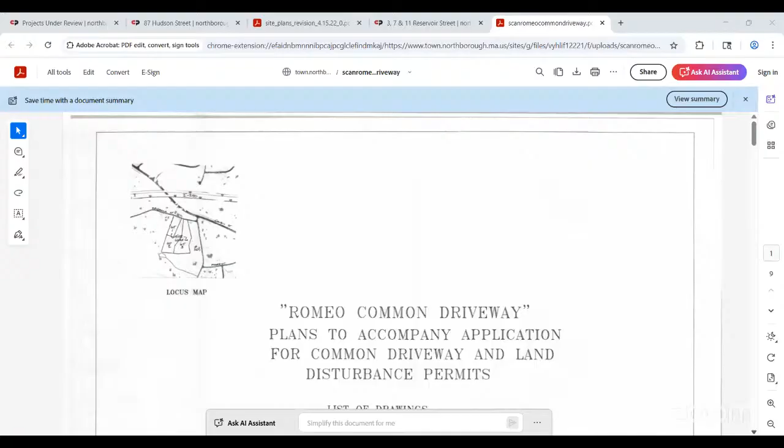The entrance is about, let's say, 600 feet from the intersection of Crawford Street and Church Street. Let's see, share that screen for us, Larry. Yeah, like 500 feet, I guess, from the intersection of Crawford Street, the Church Street end of Crawford Street.

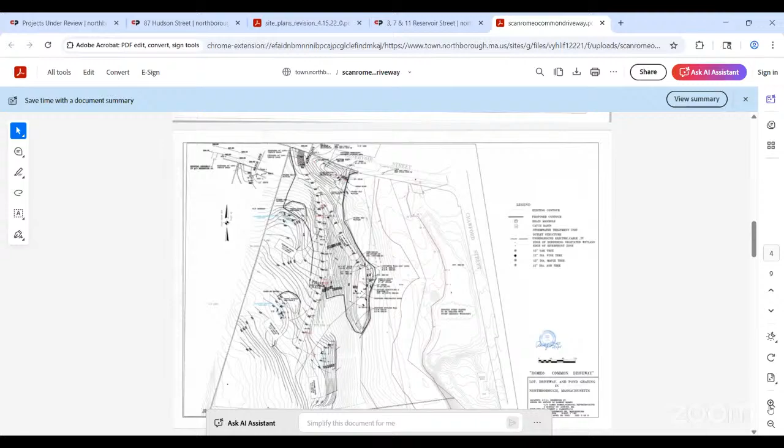So there is a good deal of wetlands on the property, but most of it is on the existing house lot, which is not included in this presentation. The house lot was previously subdivided by ANR plan, I think 3 or 4 years ago. And that house still sits on the same lot as previously presented to the planning board.

So we have before the planning board approximately 9.9 acres that we would be developing. According to our land disturbance plan, total disturbance would be about 4.9 acres. So between the detention pond, which we need to control stormwater, and the houses and the driveway, our total disturbed area is approximately half of the total area of the 3 lots.

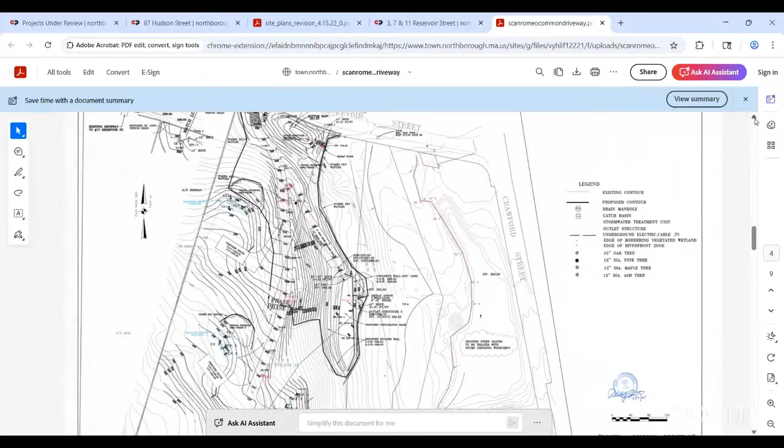Lot 1 is about 2 acres, and then the other 2 lots are reduced frontage lots, so they have 50 feet of frontage, and they have over 4 acres, I think. 4.07. So I think 4 acres is the limit for the reduced frontage lot. So lots 2 and 3 are reduced frontage lots.

So Laurie has pulled up the plan here, which shows the limit of the driveway on the left side of the screen, the dash line proposed. The easement line is 30 feet, and the proposed pavement width is 20 feet. Up at the southerly end of the driveway, where the hammerhead is, that hammerhead is proposed so that the fire trucks can turn around and come in, and if there was a fire, they can easily get out of the site. That is a typical dimensional turnaround for the big fire trucks.

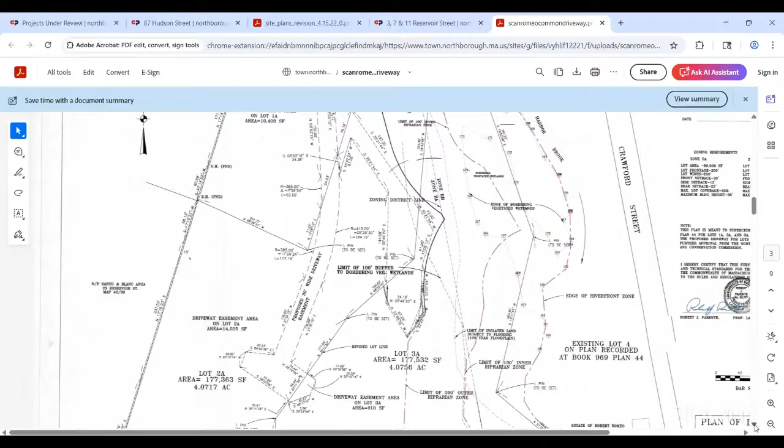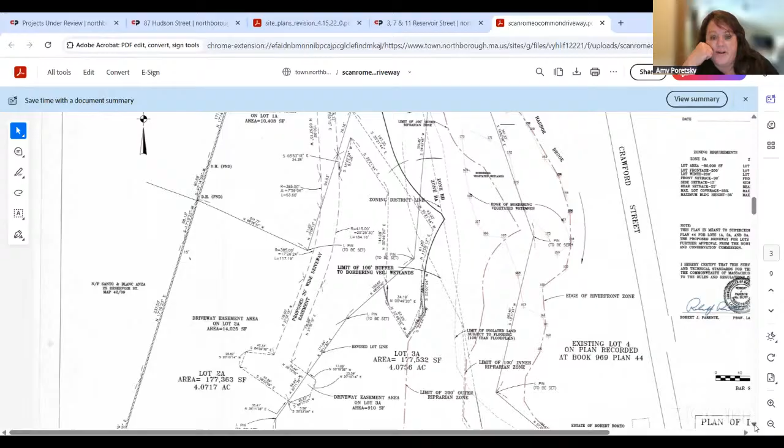Question while you're talking about that - will both lots 3A and 2A connect to the hammerhead? I don't see the houses on there, so I was wondering, are they sharing the hammerhead? Yes, so there's a little bit of driveway easement on lot 3A. So the limit, a little bit of the hammerhead is on 3A, but most of it, the majority of it, is on 2A.

But the house, will that be up on the hammerhead, is that what happens? No, the hammerhead - so the folks that buy the house for lot 3A, they basically will drive right through a portion of the hammerhead and get to their house. I see it now, yeah, it was down, I didn't see it at first where the house was. Okay, well, it doesn't show on that other sheet because that's the sheet that goes to the registry of deeds, just the way we prepare the drawings.

So conservation wise, we have actually ended up adding a plan.

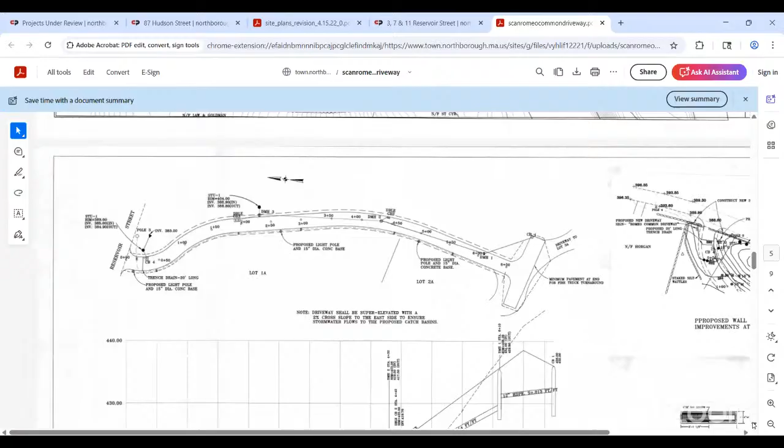So originally we had an erosion control plan, a profile of the driveway, so that DPW could see the slopes and the drainage and all that. But we actually added a drawing plan of temporary sediment storage areas. That's the profile of the driveway, and the slopes meet the planning board regulations.

I think we might be up around 9%, but the middle of the driveway is like 7%, I believe, or vice versa.

Conservation agent Vinny has asked me to add a couple of double catch basins, since he was concerned about potential water going onto Reservoir Street, which the regulations don't really allow. So the first two catch basins in the middle of the driveway will be double grated, in a 5 foot diameter versus 4 foot diameter.

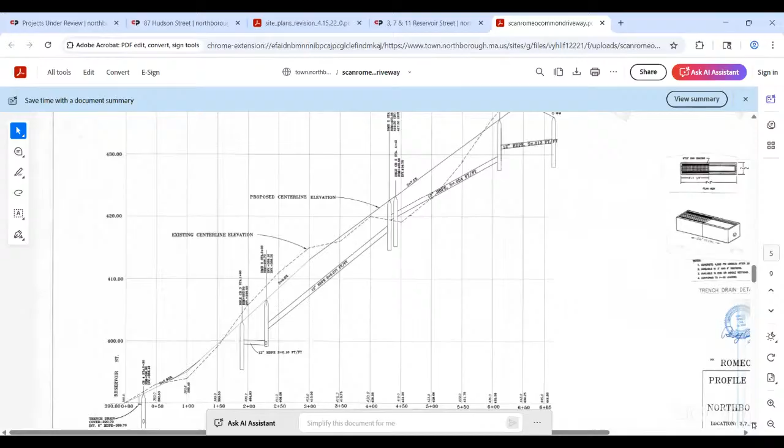So that has made some serious help to the drainage system itself. The temporary sediment areas, we're phasing the construction of that.

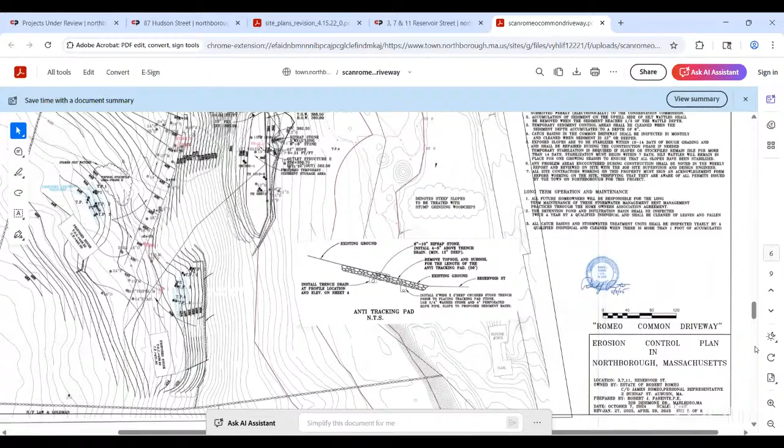Can we go back to, let's see, sheet six has the total, a dotted line for the disturbed area, plus it has the phasing line. So in phase one, we'll only be constructing the driveway up to about 300 feet in, I think. Let's see, up to, yep, there's the phasing line there, just beyond the house for lot one.

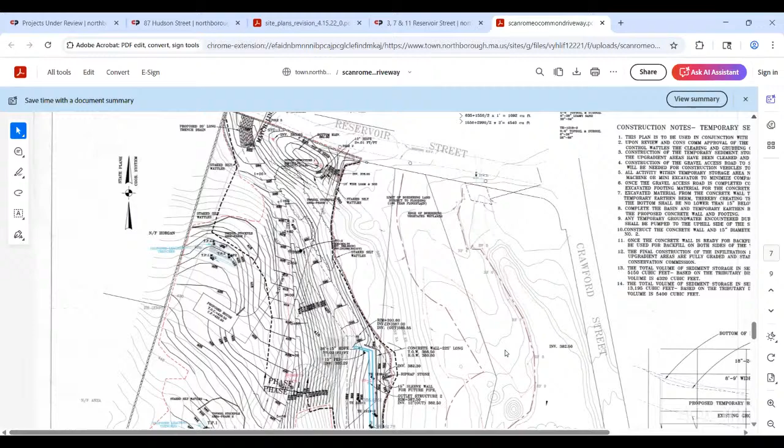So phase one, we need to get the big temporary sediment basins constructed right at the beginning so that any construction water will head towards our silt fence and our temporary sediment storage area. So this additional plan has helped a great deal to convince Vinny that we have a good solution to store temporary sediment on the site.

Laurie had one question later this morning about the water line. I think originally that either the first, so October and December, I think we did have two meetings. Yeah, so maybe the second meeting was in December.

We talked a little bit about the water line because there is town water on Crawford Street, but to bring the water line under the culvert that carries Cold Harbor Brook under Reservoir Street, we would have to dig down like 10 or 11 feet because the box culvert is so big.

So the fire chief's regulations actually allow us to sprinkle the houses. I believe the draft condition adds a note that the houses will have to have sprinkler systems in them, fire suppression or sprinklers, and that's going to be a condition of the approval. I just have a question for Laurie while we're talking about this.

I went through 1036.130, which is what we have to approve for the common driveways, and it does say if it's within 2,000 feet of the municipal water service, the applicant shall be responsible for extending the water service. I did reach out today to Scott and Josh, and Scott said it was okay if they didn't connect, but I'm thinking that we might have to do a waiver for that too. This might be a fourth waiver because it says shall.

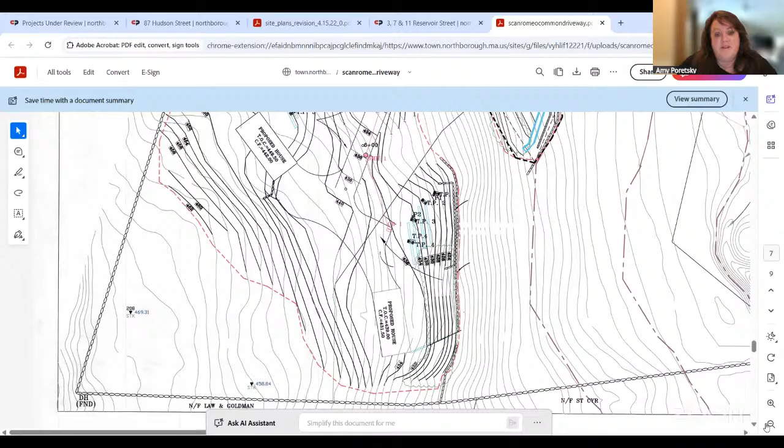Are there any specific questions to jog the members? I know we have one new member who can't vote, Carter, but I know it's been a while since we've been before the board. What I was thinking we could do is bring up Laurie's review letter, because we left off going through her review letter and she had a long list of items on it. Okay, so I can share it.

Let's see. This is small, so I hope I'm opening the right one. No, that's wrong. Yeah, I just have to click on the right one.

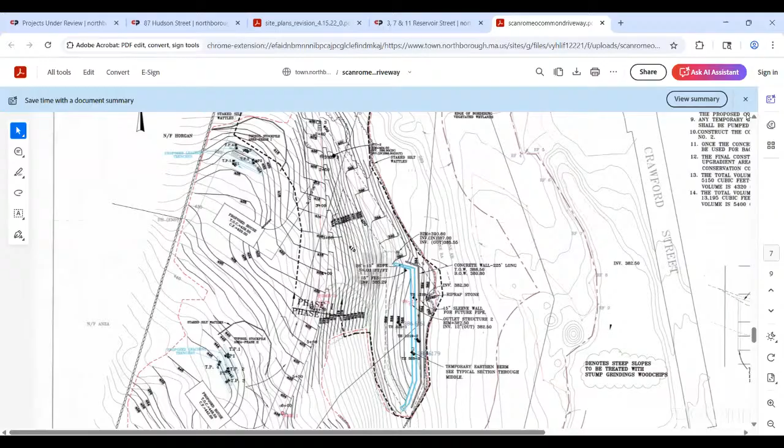I don't think they have to coincide, but I don't understand. So we're putting up siltation control and I'm showing you a graphic of the limit of disturbance so I can get an area, that's basically the purpose of that. It's not staked out yet. It will be staked out, but here's the other location.

I mean, it's pretty minor. There may not be any vegetation that would be disturbed, but of course, when you're staking, you could be disturbing vegetation. So generally, what engineers do is they extend the limit of disturbance to include the erosion control barrier. So I didn't include it as a condition of approval because I thought it was a minor issue. However, I did just want to point it out in the letter.

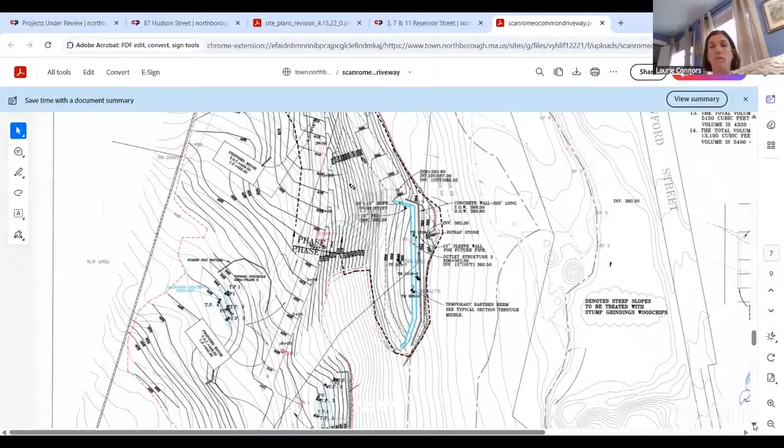So you don't feel it's not worthy of anything? Yeah, I don't think it needs to be a condition. Okay, so we'll bring this back up. That was number 5. Number 6 was addressed by the latest plan.

Number 7, it called for a minimum standard of 33 feet. They've requested a waiver. I did ask Josh as a town engineer if there's a problem if we waived it to 30 feet, and he didn't have a problem.

Yeah, I don't think it's an issue that it's 30 feet instead of 33. The pavement area is also fully inside that easement, so I think it's not an issue.

Okay, thanks. But you did mention if there were more than 3 houses, it could be an issue. So in the future, if we did get a common driveway and they asked for a waiver, it's probably always best to ask you.

If there were 10 houses up there, the amount of traffic would be increased a lot, so you would want a wider road that's safer. I think with the 3 houses there, the 30-foot easement is plenty, and the width of the roadway is also sufficient. I don't foresee too much traffic going up and down. Okay, thank you.

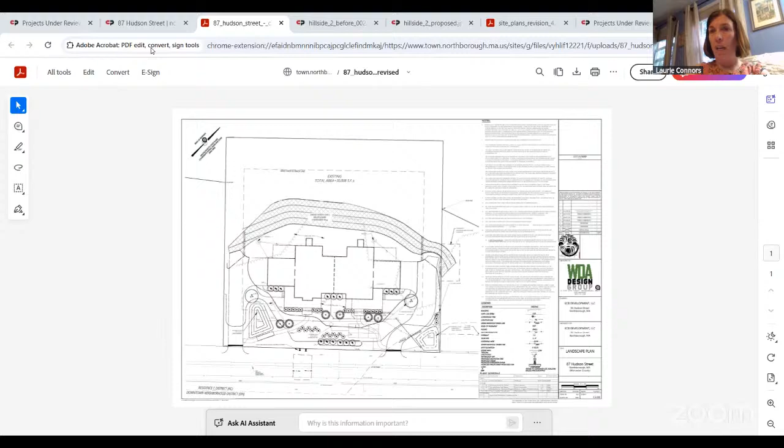I believe Michael is the landscape architect. All right, welcome. So Tom, will you be the one presenting?

Yes, thank you. Good evening. My name is Tom Reardon, I'm with Reardon and Company, representing the owner Ken Bishop. Michael Grossworth is with WDA, he can answer your technical questions, but I want to give you a little update on this project.

The structure itself is about 95% done. The rough grading and so forth is about 80 to 85% done, and we are about to begin the landscaping. We went out to bid and got comments from 4 landscape contractors, and they all expressed a concern about the viability of the ornamental plantings in this rear bank behind the duplex.

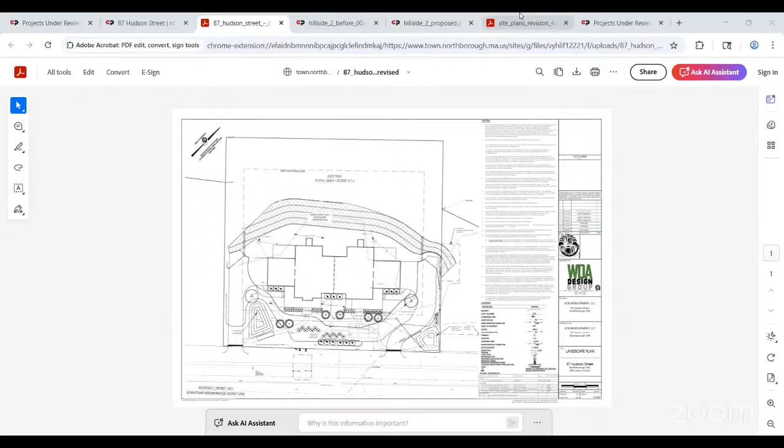So originally there was, you see that banding with the hatchwork - this is the original plan. It was to be mulched with 600 junipers, 71 black chokeberries on the upper edge with 6 black viburnum interspersed.

Their concerns were the amount of labor, water, attention, etc. to establish this and maintain it for a long period of time. They thought a more appropriate treatment would be to use a jute backing on the slope, which is 30 to 40 degrees, and use a hydroseed wildflower mix.

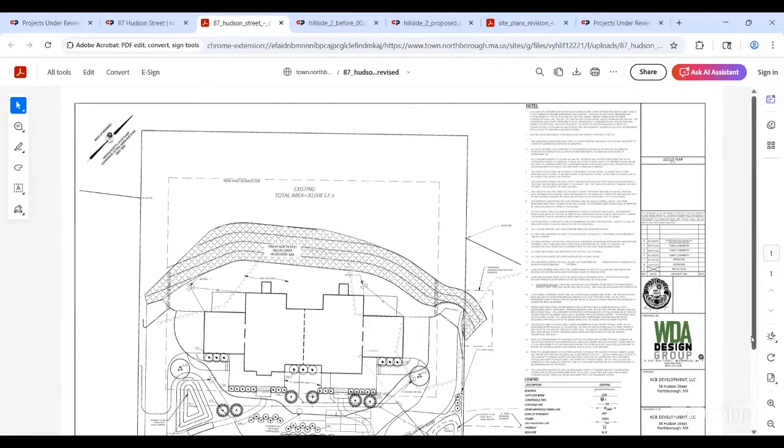Once that gets established, it's a perennial, doesn't need excessive watering. It blends in well with the vegetation behind this bank. It's better for pollinators like bees and butterflies. And we don't know what the ultimate status of these 2 units would be, whether they're going to be rented or sold, and we thought putting the burden of maintaining this bank on new owners might be an additional detriment to getting it well established.

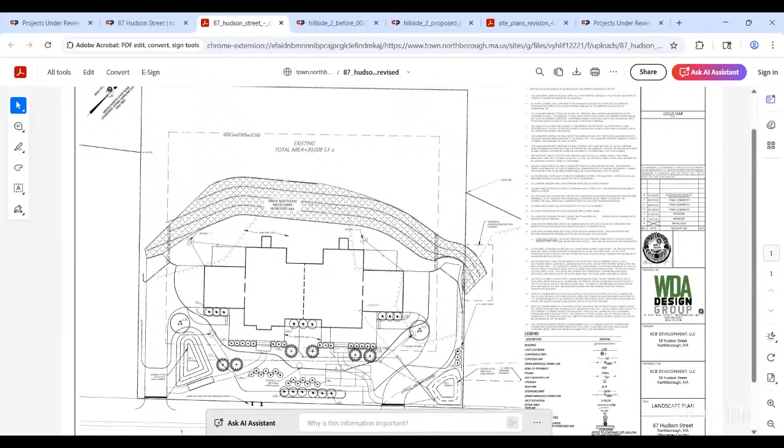So that's why my client asked me to come before you to see if you would consider allowing us to change the banking to a wildflower mix. I might also point out that it is behind the building - we're not changing any vegetation proposed in the front or sides. Everything is going to remain as originally approved, so this is just the rear bank.

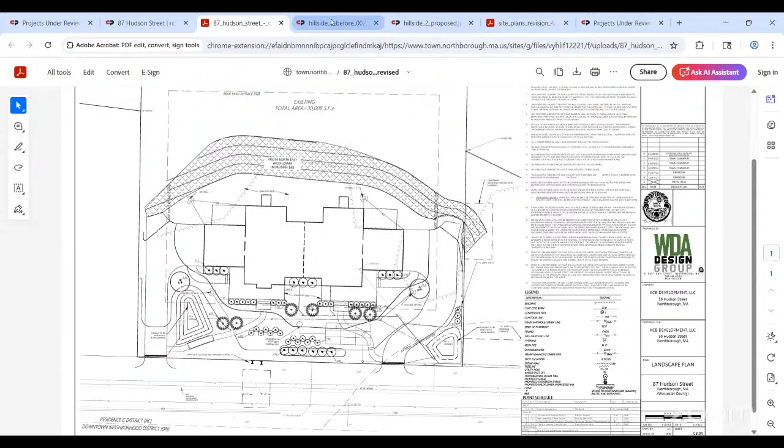I believe we have a photograph of the existing bank - this is the existing conditions. So you have this about 20 to 25 foot wide sloped area behind the duplex, and then you have some low growth and then the tree line. This other image is what WDA put together to give you a suggestion. So you have a band of lawn directly behind the units, and then the wildflower, and then the undisturbed area. That's what we're proposing.

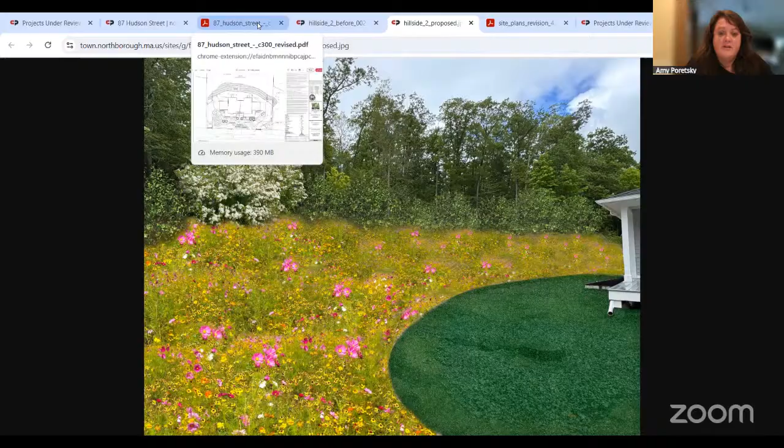Okay, thank you. Can you just point out on the site plan what is being removed, is it just the row behind? No, the whole area that has the hash marks. Alright, I just want to make sure that is the area that would have been junipers - the upper band would have been the chokeberries and viburnum, and then it would have been mulched.

Okay, Lori, do you have any comments or concerns? I don't think their request is unreasonable. The slope treatments I typically see in residential applications are wildflower meadows. When you're talking about a slope that is this steep, of course it's really not possible to mow the slope. And you want to ensure that you have a stabilized area that's not going to erode. So in my opinion, the wildflower meadow makes sense.

Is it going to be really difficult to maintain this area with the junipers and all the shrubs? What is the slope, I'm just curious, is it 2 to 1, 3 to 1? It's 40 percent, about 2.5 to 1.

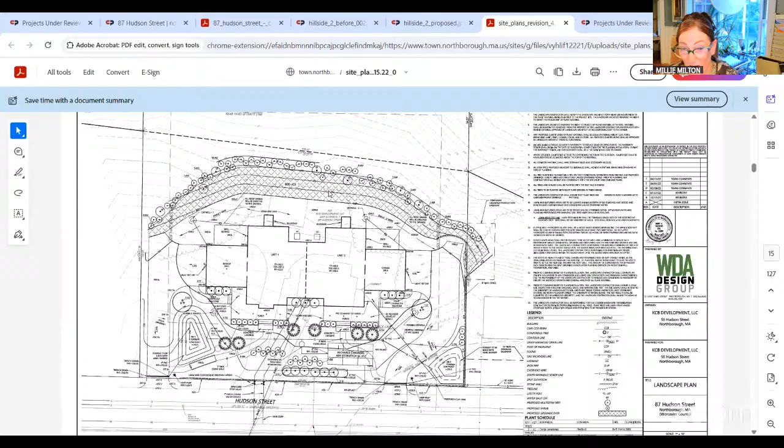I mean, I have seen some that don't successfully take root and then you get bare spots, and it's just - in the back it's not going to be unsightly, but certainly if it were in the front it could be a consideration.

I can't imagine it would be maintainable for a long time unless you really put some significant effort into it. And I think if a homeowner was there, ultimately they'd probably just mulch it anyways. But I don't have a problem with it.

No, I think it could look beautiful, actually I like it better. Okay, does anybody else have any concerns or questions?

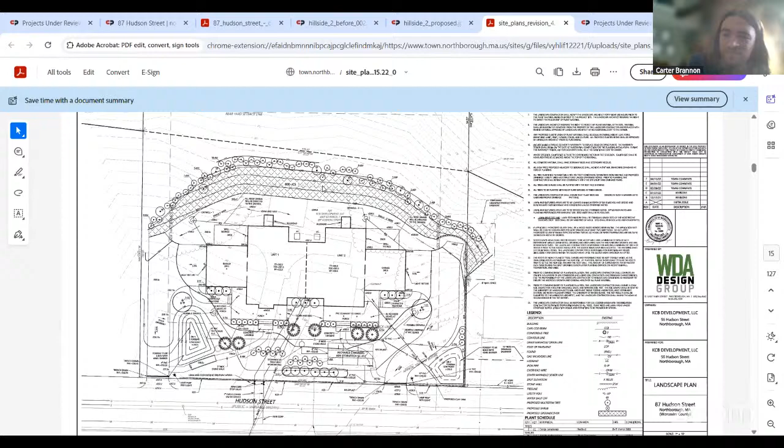Sure. Okay, how obviously different is it from the lawn area? It seems like it would very much blend in with that. And would it be a problem of it being possible to mow parts of it, or does it matter? I think it would be too steep to mow. Okay.

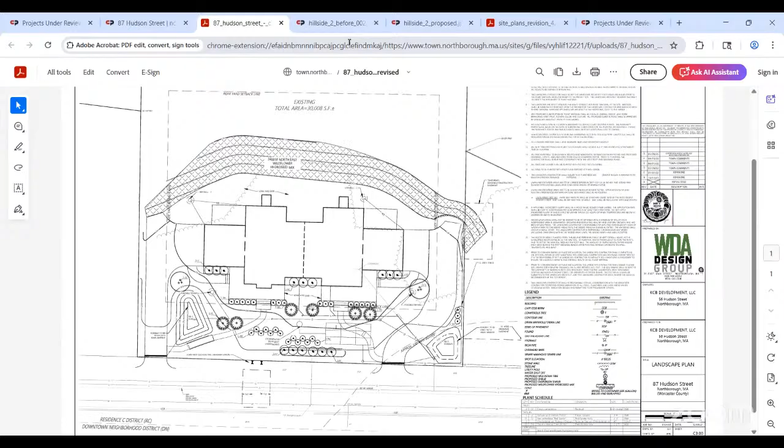Okay, all right. So hearing that the board, you are in favor, the majority, should we take a straw poll vote? You want to take a vote? Lori, how do we do this since it's just a letter? Do we vote? You're muted.

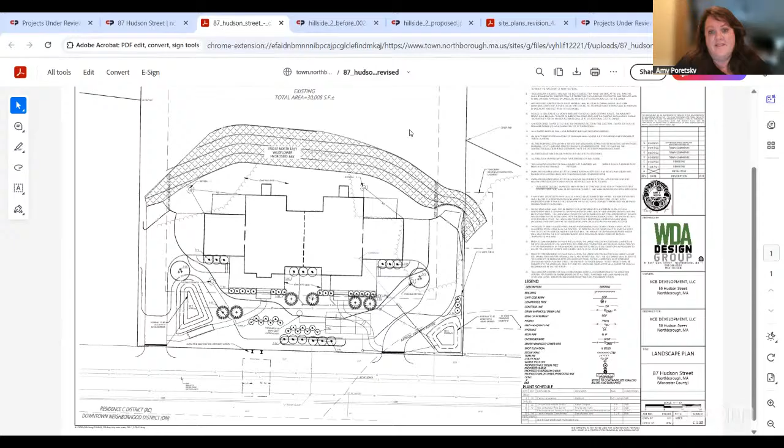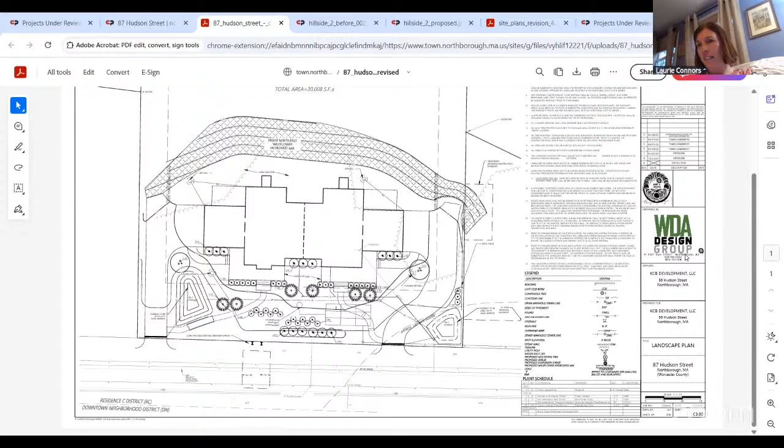What I would recommend is referencing the plan. I would suggest making a motion to approve the modification to the landscape plan as depicted on the plan entitled 87 Hudson Street, Northborough, Mass, prepared by WDA Design Group. I gotta blow this way up so I can read it. Oh my goodness, getting old is terrible.

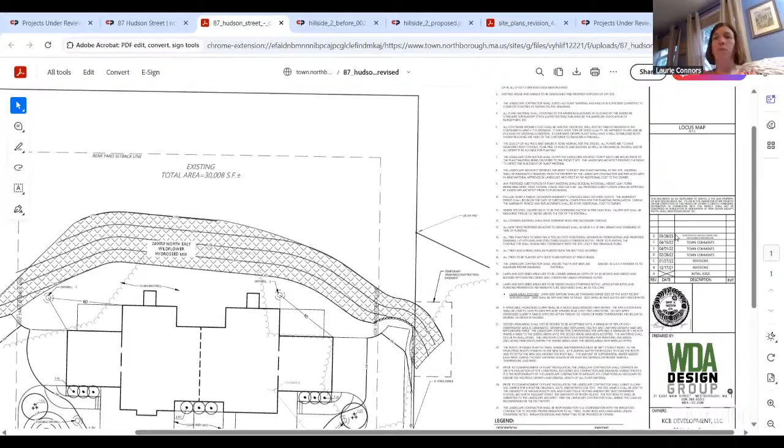You don't have a revision date on this plan. Oh, there it is. It's originally dated 12/9/21, last revised May 28, 25. So moved. I'm just kidding.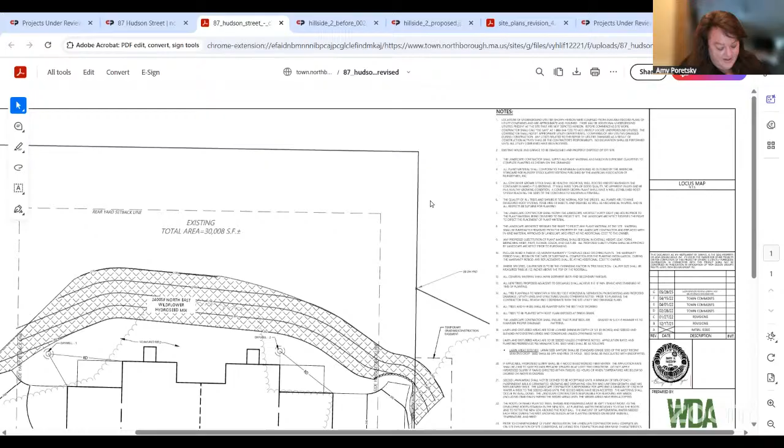But can we take the motion as Lori just stated, or do I have to say the whole thing over again? I guess. Do I hear a motion to approve modification to landscape design of 87 Hudson Street per WDA design, original date 12/9/21? Yep. And the current revised date is 5/28/25. Hey, I did pretty good.

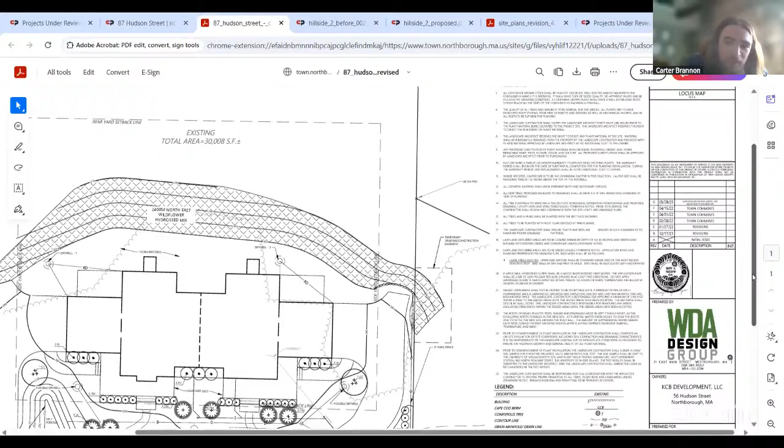So moved. Second. Okay, I'll give it to Millie and Bill. Roll call vote: Anthony Zaitin, Aye. Carter Brannon, Aye. Bill Pierce, Aye. Millie Milton, Aye. And I'm an Aye.

Okay Lori, so do you have to write up the letter and add it to the file? I will, and I will email it to you for final approval. Okay, sounds good. Thank you very much, we appreciate it. All right, good luck. Good night Tom, thank you.

All right, I'm used to Carrie doing this. I was sitting there waiting. Next on the agenda is, are there any A&Rs, lot releases, or bonds? None. Okay, on to old business, new business.

I had sent out some changes to the minutes from May 20th, 2025. Did everyone have a chance to read them or have any other changes? No changes for me. Was that a no? Nope, no changes. Do I hear a motion to approve the minutes as amended for May 20th, 2025?

So moved. Second. Okay, roll call vote. Anthony Zaitin, Aye. Carter Brannon, No. What do you mean no? You don't approve the minutes? Or, yeah, I actually had some questions about the minutes.

Oh, okay, sorry, just trying to pull them up. Well, first, it probably doesn't really matter necessarily. One of the changes was about Mr. Brannon won't be able to vote on the application because before he was elected, as opposed to he missed. I'm just curious, in the hypothetical event that somebody was elected to the planning board and had attended all of the meetings, would they still abstain? And does having the minutes written one way or another create a precedent of that?

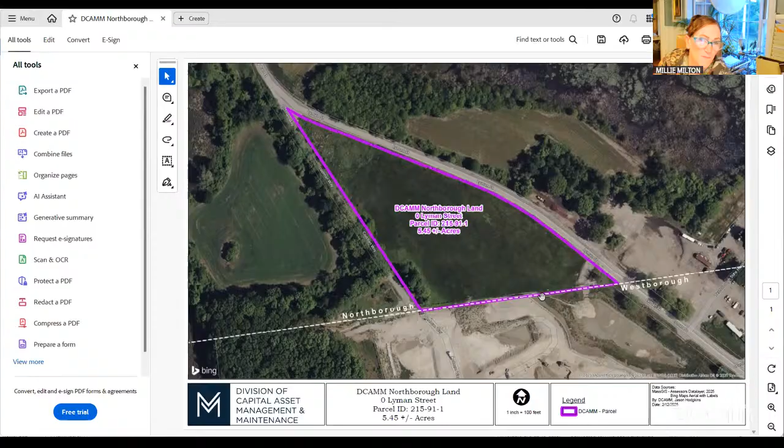Right, but for some reason I thought it said it specified multifamily. Can someone bring it up? I do have another page that talked about the rules, it's a PDF. Okay, it says it's on the road with a large multifamily development - that's the one on the main road I was talking about, the 55 and over development in Westboro.

I do think there are rules and regulations - there was a PDF sheet and I just started reading it, so I don't know for sure. But I know they can override zoning. They said if a vacant parcel was zoned industrial, then you have to allow housing regardless of the zoning. So I'm wondering if the state is also going to say that if you're in an RC district, you don't have to do single family, you can do an apartment building. I haven't read it closely because I was prepping for tonight's meeting, but I could send out the rules.

That would be interesting. Would it be a possibility, if we're meeting with people, that we end up trying to rezone the area depending on what the ideas are for what's going to happen with the property? Well, I don't think we have to rezone because I think the state is going to say what we have to do, whether or not we rezone it.

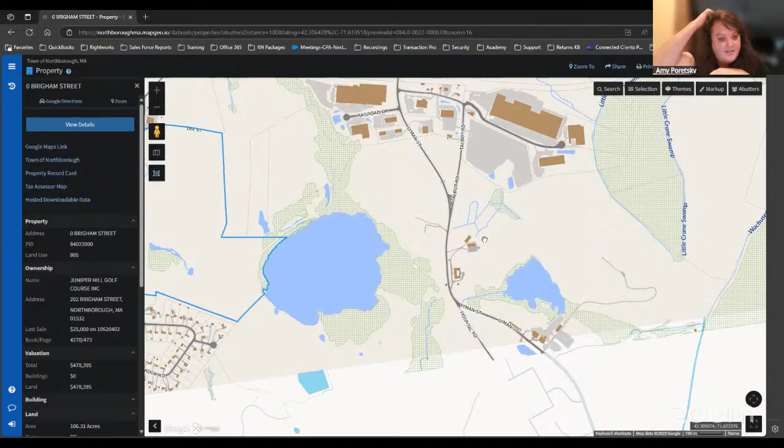Is that over here? No, go the other way to the right. There, yep, that's what I was wondering, if that was the Westboro portion. That's DCAMM, yeah, and that's like 162 acres. Interesting.

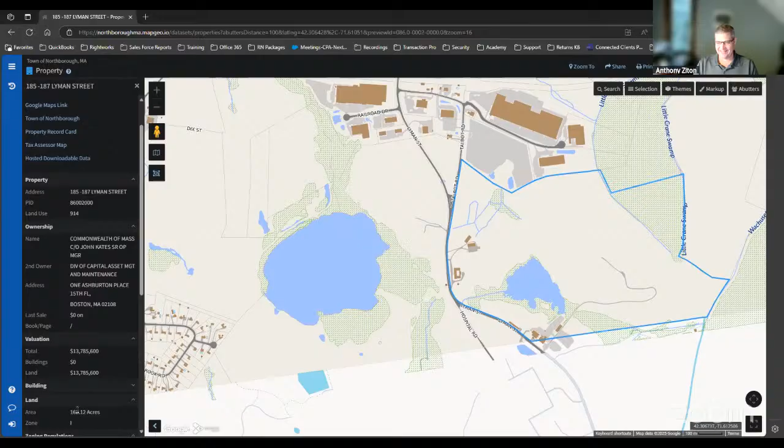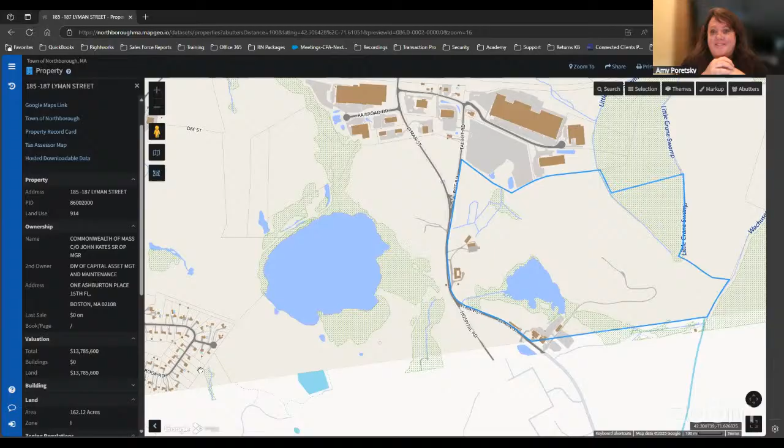A little concerning. So I guess we have to see—in the materials it says regulations to follow, they throw it out, you're going to have land auctioned off and there are certain criteria, but they'll follow up with more updates. When I saw it said they were looking for input from the planning board chair and the zoning board chair, that's why I thought we'd have a meeting. I think it would be good because they may come up with other questions that should be presented to the state to say, here's what we're concerned about or would like to see answered.

So my input would be we should probably meet, or have a placeholder to meet, just to see if we develop any questions or thoughts between now and then. Right, because it's all so new.

Do we invite anyone else? Do we invite the ZBA or not, or do we just talk as a planning board? I think input especially from any of the services, whether it's fire, police—I think the schools are the primary ones I'd want to hear from. But I'd have no issue with the other boards attending for feedback and input. I think if you put it out there and they want to send a rep, they can attend in whole. If a lot more people would be at the meeting, would an in-person meeting make more sense?

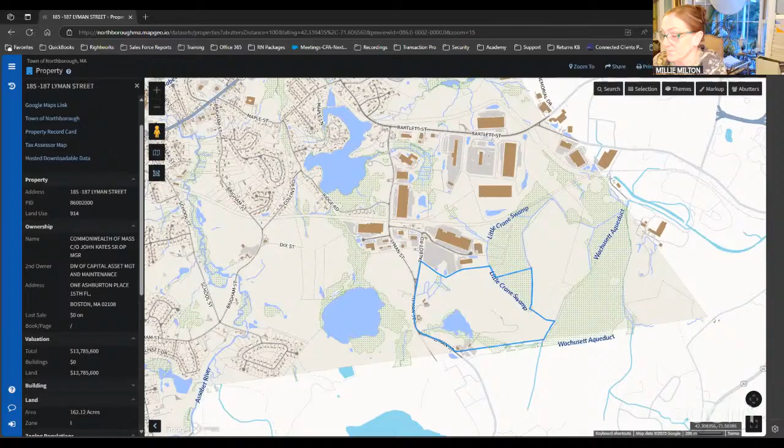And then the MPIC meets on July 17th, so that's all we have on the agenda. Do you guys mind if I talk to Lori outside the meeting about what we're going to do on the June 17th meeting? If the ZBA can come, that would be good and we'll try to pull that together. Nope, don't mind at all. I think scheduling is always bypassed by open meeting rules. Okay, I just didn't know if you guys were okay with inviting the ZBA and maybe the Board of Selectmen, just to give them a heads up, even though it's a small parcel.

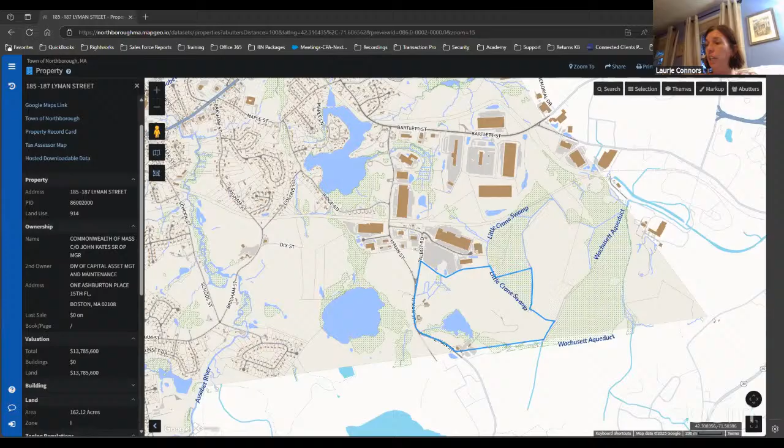Anybody else have anything else they want to mention? Oh, Laurie does - I just wanted to give you all a heads up that we are going to have the second community outreach workshop for the downtown streetscape project on June 30th. It's a Monday night at 6:30 at the public library, so mark your calendars. It's Monday, June 30th at 6:30 at the public library. And it's to discuss the Blake Street streetscape project, right? Yep.